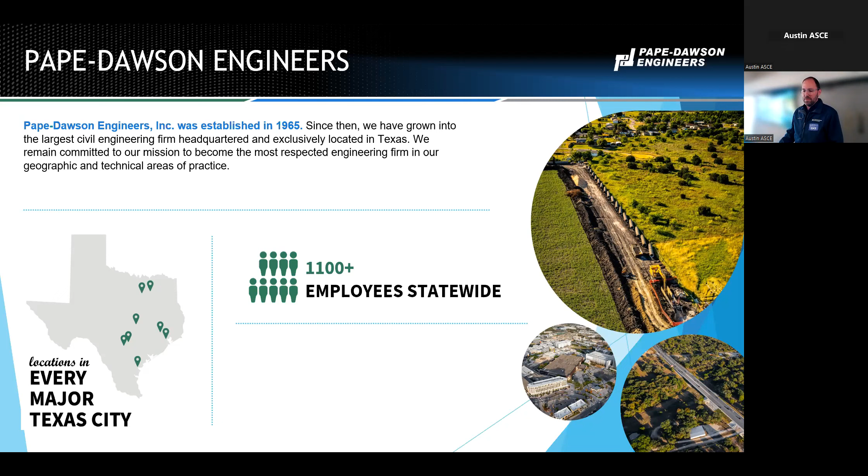Wanted to just talk a little bit about what we do and where we're going. I've noticed with our social media really ramping up, I think you see and hear us more in the community about what we're doing. We've been climbing the ENR rankings and Business Journal rankings. We're really becoming a full services engineering firm, and so we like to be active in our communities and volunteering.

Here's my Pape-Dawson contingent. You guys want to introduce yourselves? This came to the office 2 weeks ago. Yeah, so Brian found us, I don't know how, on social media, but he thought we were a pretty cool place to work, so he picked up his life and moved down here to Texas.

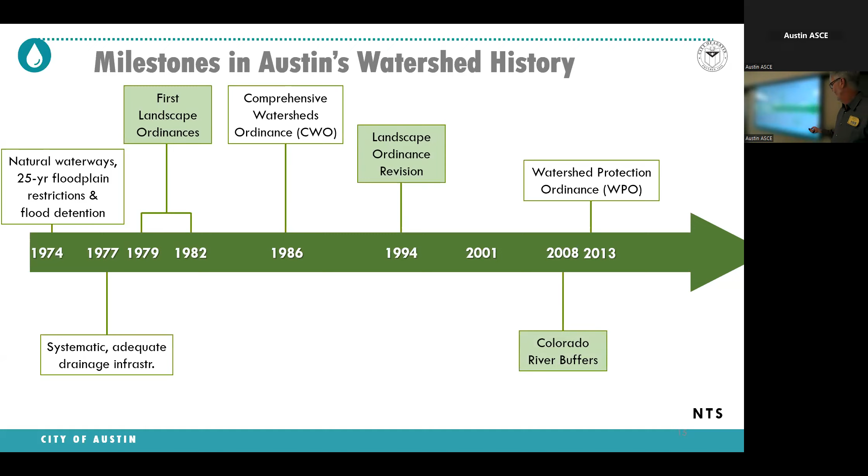Then in 2008, I got to shepherd this one through. We corrected some problems with our Colorado River buffers in this exact same area I'm going to talk about today. So we're going to talk about Colorado River buffers.

We're going to talk about functional green landscaping. I should have put on here that in 2008 we also had the commercial design standards, and there's a slide about that. That changed the way we build in Austin. Instead of having big parking lots in front of buildings with the Target or the Walmart behind it, now you're seeing Texas wraps and all these things up on the curbs, looking a lot different in terms of development patterns.

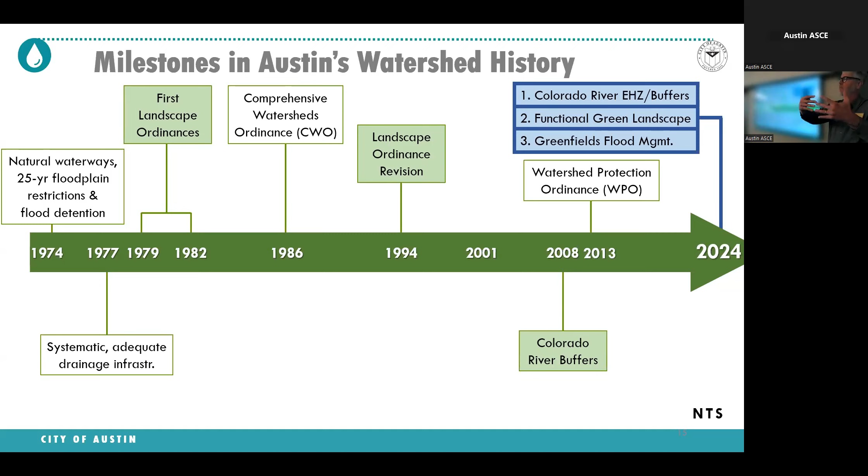All right, I'll talk about Colorado River first. A lot of words in here - I'm going to blow through these because I don't have that much time, and they're kind of tedious.

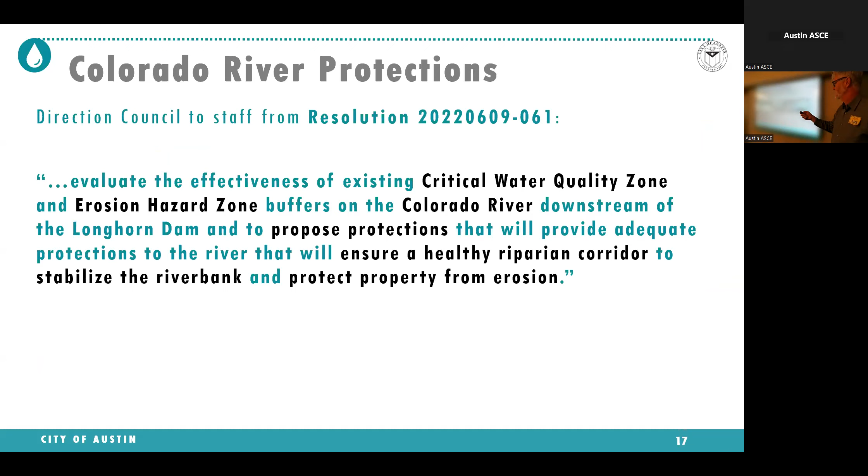Basically, the council says we need you to look at erosion, and we need you to look at water quality along the river below Longhorn Dam. That's where the river, since the Highland Lakes system really slows the water down coming through - it's not really a wild river downstream of Austin, but it's not a lake for the first time, right where Pleasant Valley Road is down there.

So thank you, Liz, who did a whole bunch of the work on shepherding this through initially last year, and a lot of these slides are from her slide deck. Anyway, we have crazy erosion going along those banks - it's kind of a normal process, you have erosion along a riverbank, but we need to make sure development is not harmed by that, and people are aware of the risks they're involved in.

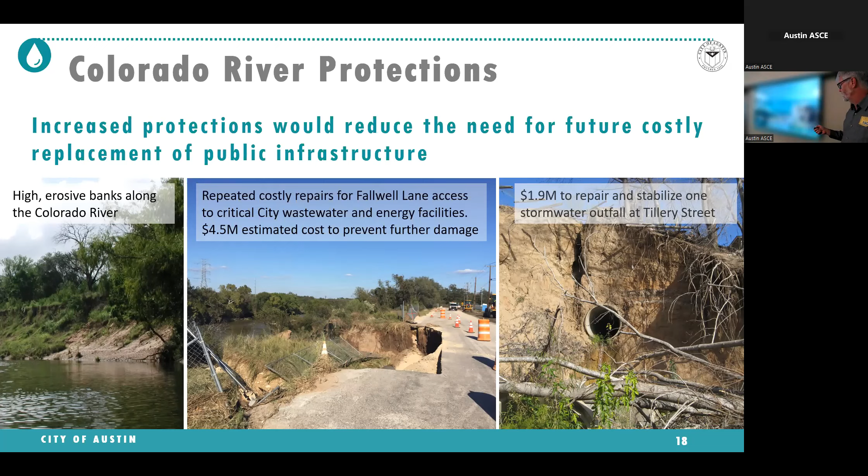I'll show you more pictures of Fallwell Lane there - that was a real problem, a $4.5 million project there. Another $2 million to repair this Tillery project, and I'll show you a few more shots of it. So the river is a river, and it's moving around, it's dynamic, and that's what happens.

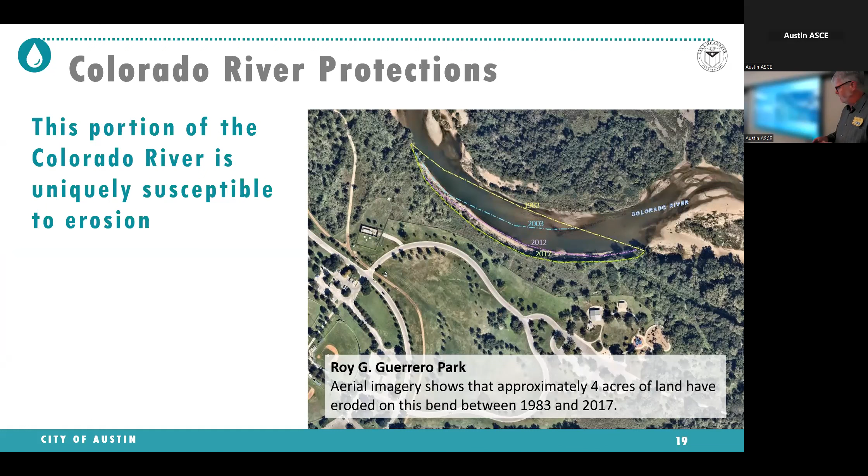And so this is just sand in here, and when the river is... this kind of charts these different - I don't know if I'm getting out of the picture here for my web people - but anyway, the river's really moving around, and it's really important that people understand that dynamism, and that our regulations understand that as well and work with it.

The community rightfully looks at this as a really incredible resource. I'd say the area below the Longhorn Dam is kind of undervalued. We focus on the lakes, which are beautiful and have tons of public participation, but there's all kinds of beauty, natural wonder, recreation opportunities, and natural function along these areas too.

Going back to the 80s and that milestones slide, we've done a pretty good job with stream buffers, but we're still trying to figure out the right size for the river buffer, which is just a different animal than a smaller creek.

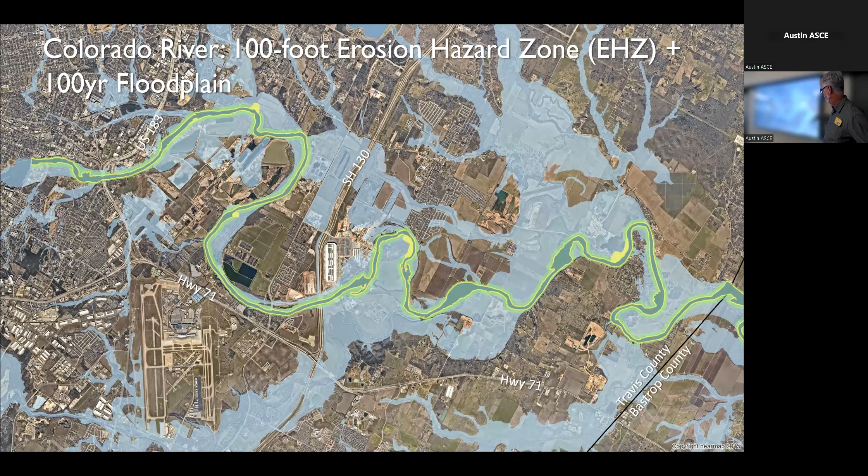If we take off the floodplains briefly, you'll see the green is the critical water quality buffer zone that protects natural resources and function. The yellow is a 100-foot erosion hazard zone, which is kind of thin for this area. That's probably inadequate for a big river like this—just the basic calculations of bank height times 4 or 5 to 1 would put you at about 400 feet from there.

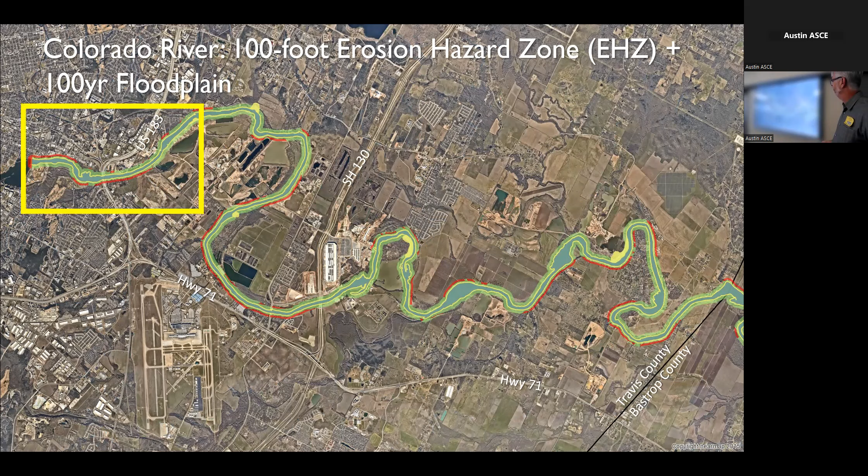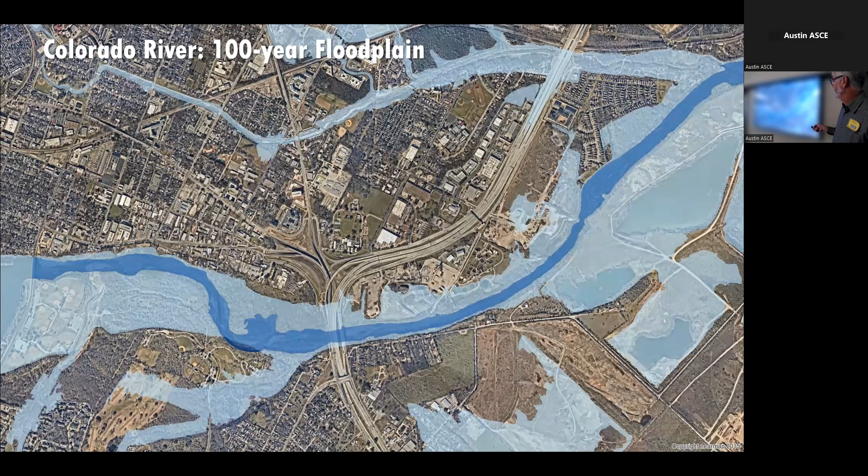So I'm going to zoom in on this rectangle. Here it is, zooming in, and this shows what's going on. Here's the river itself, here's the floodplains, and here's the current water quality protection zone.

This actually shows the genesis of the last buffer correction we had. This development was able to go in before the buffer was corrected last time, and a bunch of houses are literally like 40 feet away from the river. We've had a lot of those residents come say, could you guys take a look at this, we're a little scared here. This is a problem, and this could not happen today—you'd have to build out of that. But it was unfortunately a legacy of the past.

So what we're looking at now is potentially filling that in, and instead of having a variable 200 to 400 foot river buffer, going ahead and just calling it a flat 400 foot buffer.

Turns out Travis County, some years ago—I need to get the exact date, probably about 10 years ago—actually passed a 400 foot buffer. So if you go past our jurisdiction, it simply turns into a 400 foot buffer. There's a lot of discussion about ETJ release, with people saying the state just allowed us to release from the ETJ, why don't we do that? Well, if you did that, your project would actually become subject to the Travis County ordinance, which we think is a good protective ordinance. So we're looking at expanding this to 400 feet.

Whenever we do an ordinance like this, we look at the impacts to the affected properties and communities along the way. There's a lot of single family and other smaller lots along this reach that are shown in red. That would be the area of change—the area that would now be protected that currently is not.

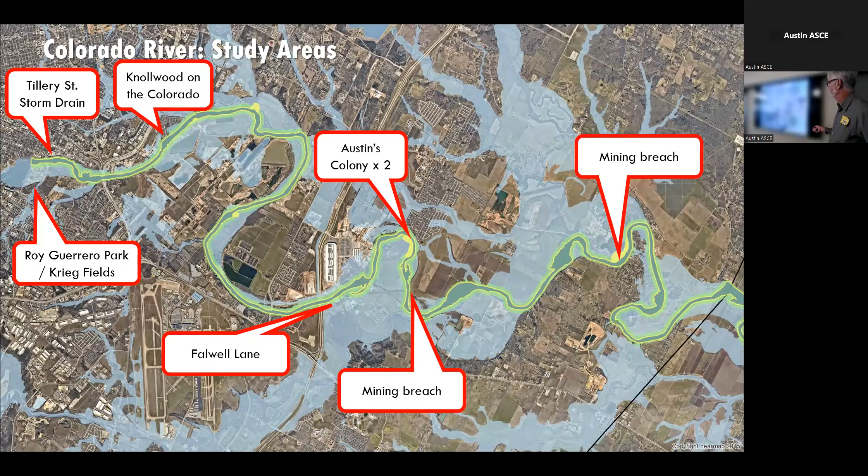So this was Tillery Street. This is really close, right across the river from Roy Guerrero. This used to be—you see these sections of pipe—this is a 66-inch pipe.

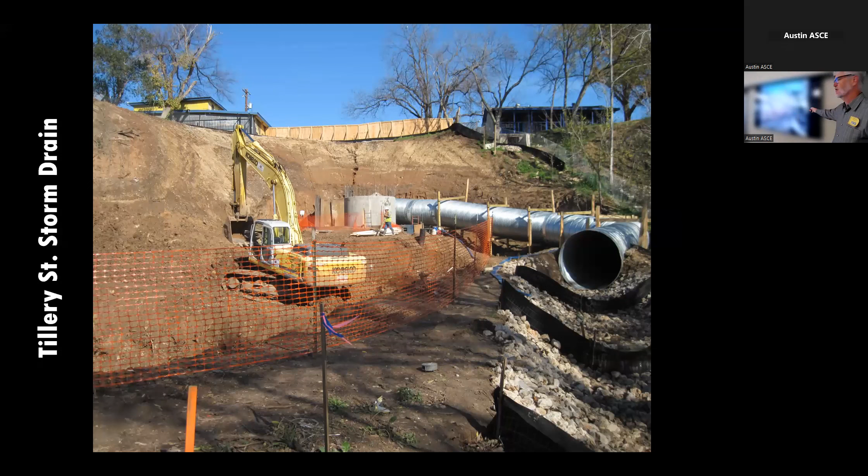This is not a trivial, 24-inch or 18-inch pipe, that's a giant pipe. So you have a giant project which had to correct this. I think this is during construction, right Morgan? So that's not even the final look, this is the final look. So it's this big high bank, it just collapsed and melted away because they had all this source of water running off, I think just a parking lot. Was that right, or was it from the street? So a pretty small source of water created that whole mess.

So we just didn't understand what that looked like when that was going on. I think the parking lot might have redirected the water. Yeah, it comes further up, more up Tillery.

So in Roy Guerrero, we've got this pre-photo and then the post-photo, this is the same, literally same view. HDR and some of our staff put these slides together sometime back. But anyway, that's unbelievable, and this is from the same vantage point, so it's just cut down that far, going through sand and gravel.

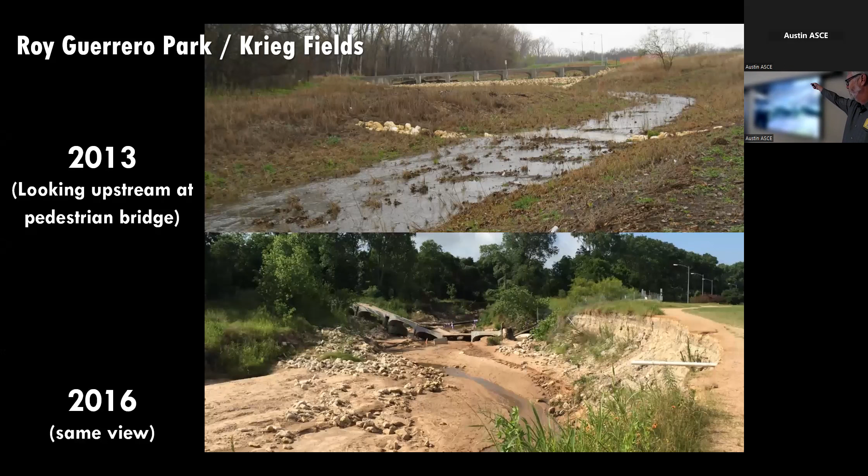Pretty painful. And so here it is again, if I can do it right - there's the same view of that beautiful pedestrian bridge, wiped out. So we're losing a lot of good stuff here, investments.

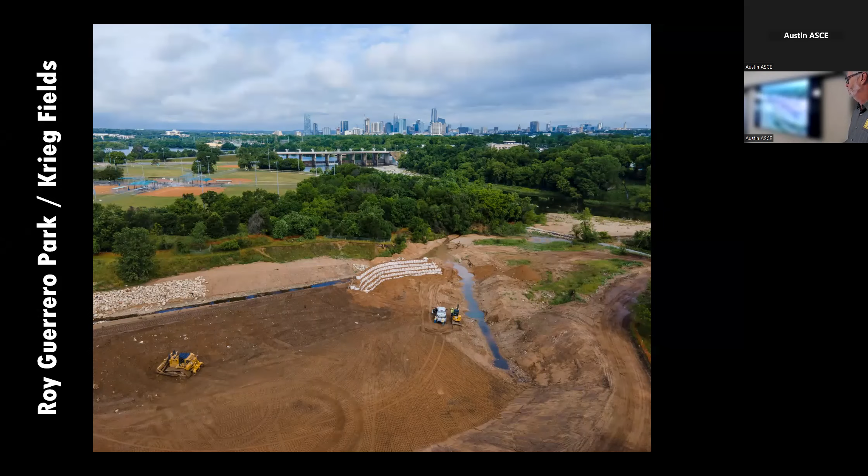And so now, this has been a little while back, but we're coming in trying to repair this, but it's many tens of millions of dollars to repair once the damage is done in this case. Look at that, that's very large scale. So we want to avoid this kind of thing with the way we develop.

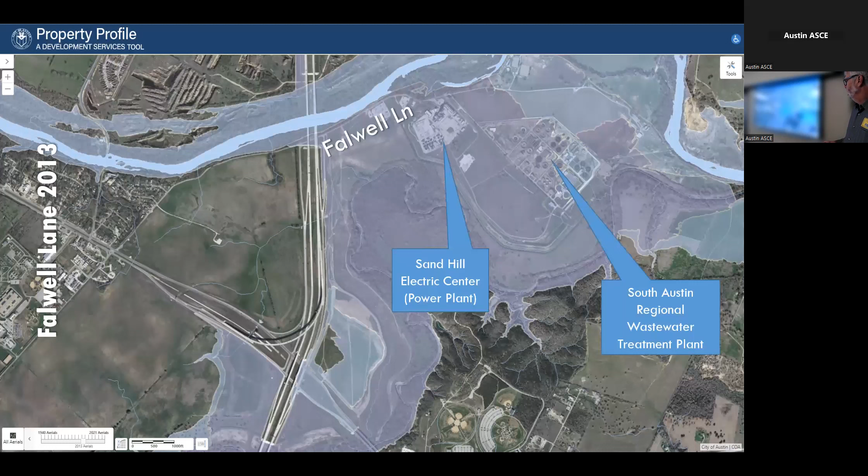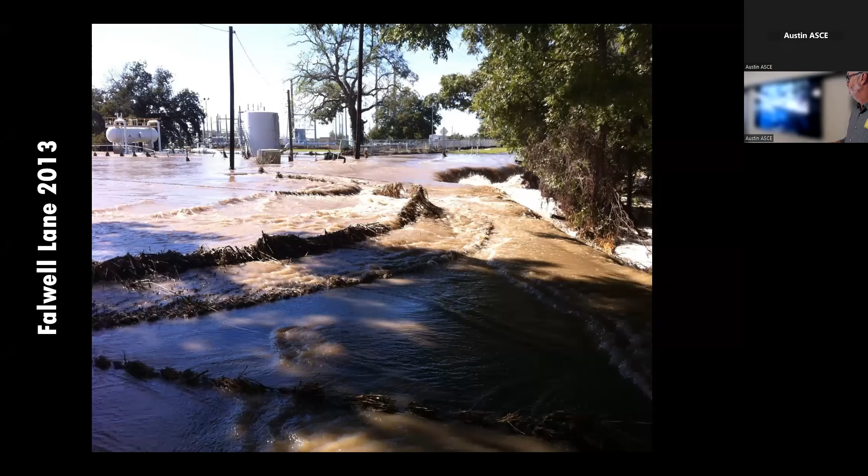This is just one more - this is Fallwell Lane during the 2013 Halloween flood. Onion Creek, bending along here, just overflowed straight to the river, wiped out a big section of the road. Here it is. So again, this is just right above sand, it's really erosive. So we need to figure out a better way to build.

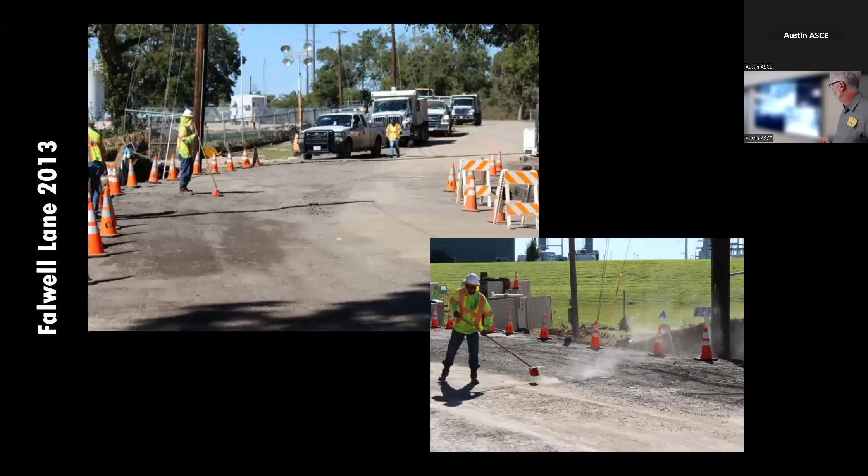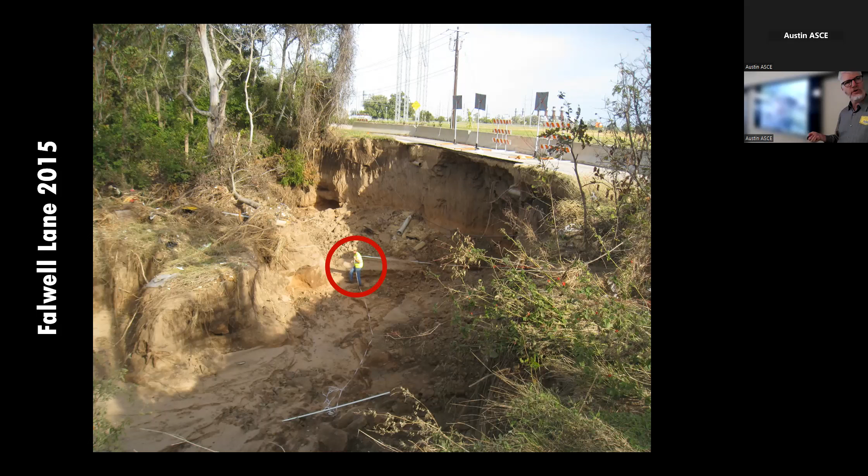So all these guys worked around the clock, got it rebuilt, and here it is, they fixed it, and then in 2015, two years later, it washed out again. So now we've got that - what was it, I forgot how many millions of dollars, it was $4 million or something. We're putting in like 60-foot piles or something like that to fix this. It's a non-trivial exercise in this huge river system that is built in sand. Look at that scale, and TxDOT's having to fight this.

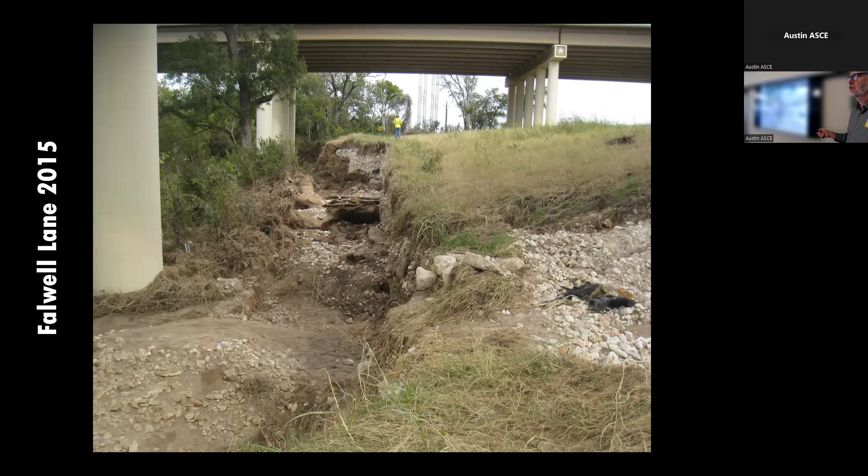This is SH-130 right next to Fallwell Lane. I think we're predicting they're gonna have some serious issues over time, the way they've got their drainage set up, but hey, we'll talk to them if they want some advice.

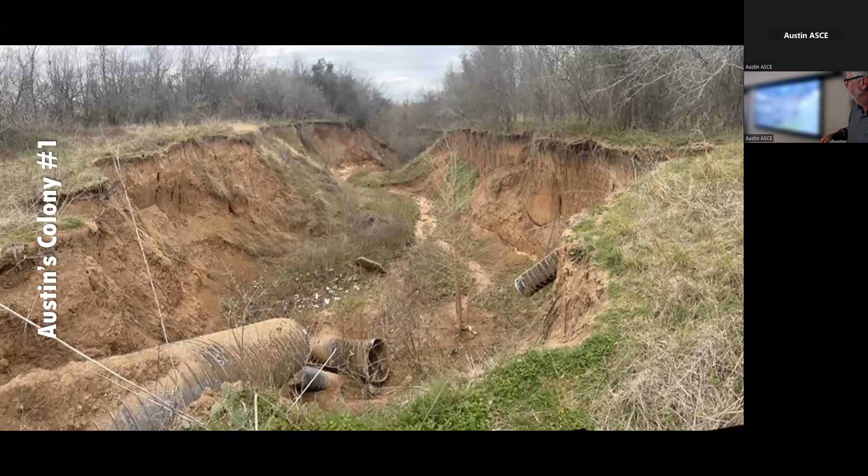Sorry, too many clicks, come on - too clever by half. There it is. So here's the water creating this canyon. It's really hard to get the scale, so I'm gonna go on a pretty near-term field trip with my erosion buddies out there. It's hard to imagine, the picture doesn't justify how alarming this is. Here's the other one, that's a smaller one.

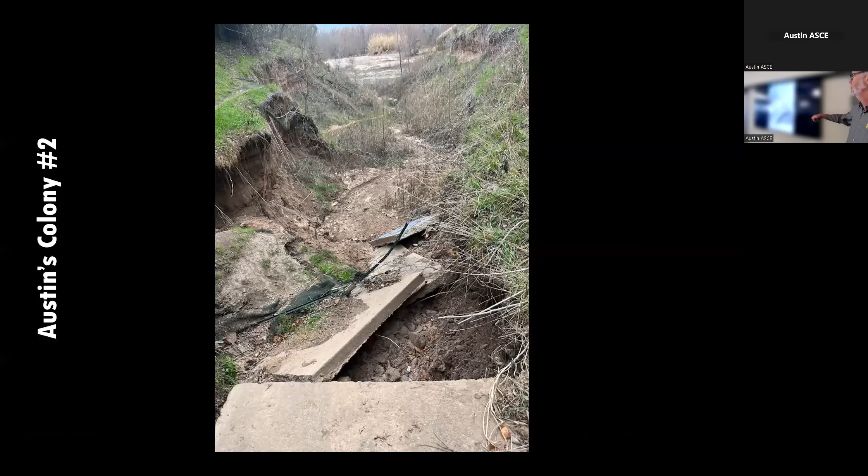But basically, we are looking at erosion hazard areas, and we're studying kind of where the action is, how far back we'd want to have a provisional erosion hazard zone, a verification area I guess you might call it. And then later on we probably are going to hire a consultant to map out that downstream to do a more official job. But we need an interim product, a little bit like Atlas 14, where we said we're going to use the 500-year floodplain, the old one, as a standby, and then we'll get it done in the next few years.

All right, so I took way too much time on that one, so I'm going to have to go faster and faster as I go through. Functional Green is a landscape ordinance.

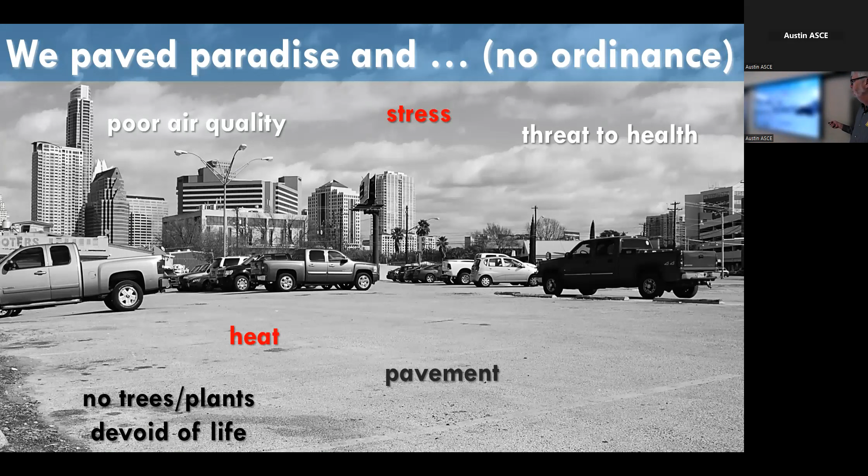I'm just going to blow through and talk about this. So we used to not have any landscape ordinance at all, and so you could just build a parking lot or whatever. And so folks did - they built parking lots, and things got really hot as a result, and uncomfortable and maybe unhealthy even. And so we had our first landscape ordinance, as I talked about earlier, in 1979.

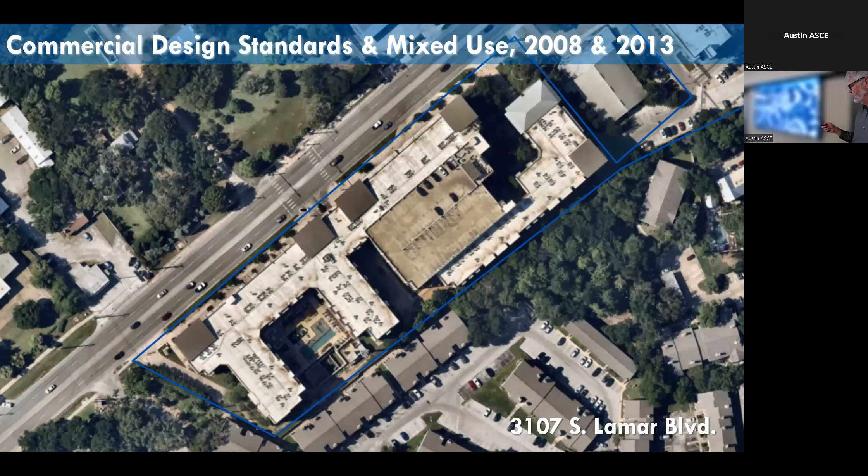Well, now we're bringing our buildings up to the curb with Subchapter E / commercial design standards, and so you don't have a lot of room there for natural systems. And so here we go - we have, yes, a row of trees in the front, but then you've got these big buildings and so forth, a lot of kind of embodied energy or heat radiating off of them.

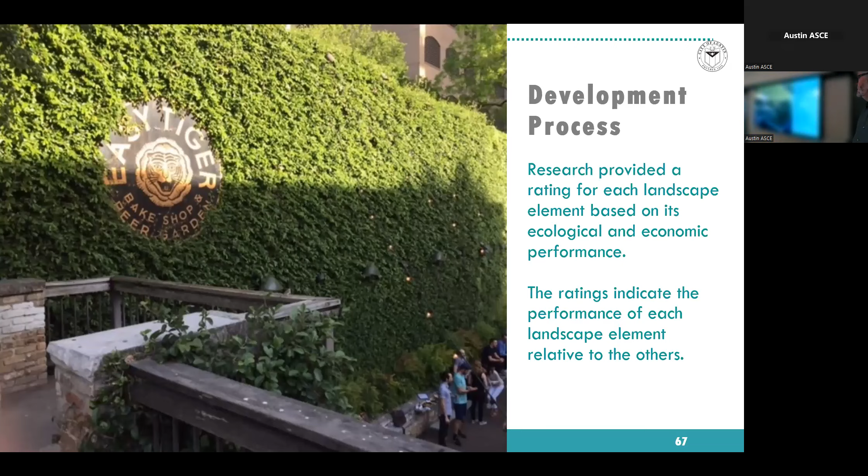So we're going to try to go from today's version using some systems that we've studied across the world, and in the United States, in Seattle and Washington DC. We have these two examples that we're coming up with a system that's pretty similar to them, although made more specific to our area ecologically. So we had these wonderful folks do a bunch of research on this, looking at those other systems. Again, I'm blowing through this.

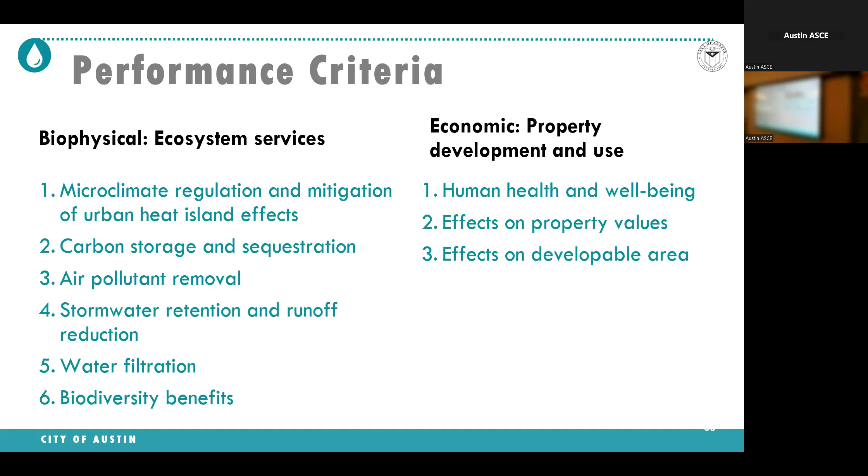We're trying to get ecological benefits, trying to make sure that this is economically feasible and makes sense for the projects. So all those things were taken into account when they first came up with the system.

It's only going to apply if your project is above 80% impervious cover. If your project has the right to have more than 80% impervious cover, you can't say 'oh, I'm going to do 79% even though I can do 85' - you'll still have to do it. But if you're at 80 or below, this won't apply to your project. Anything above 80, and it'll apply downtown.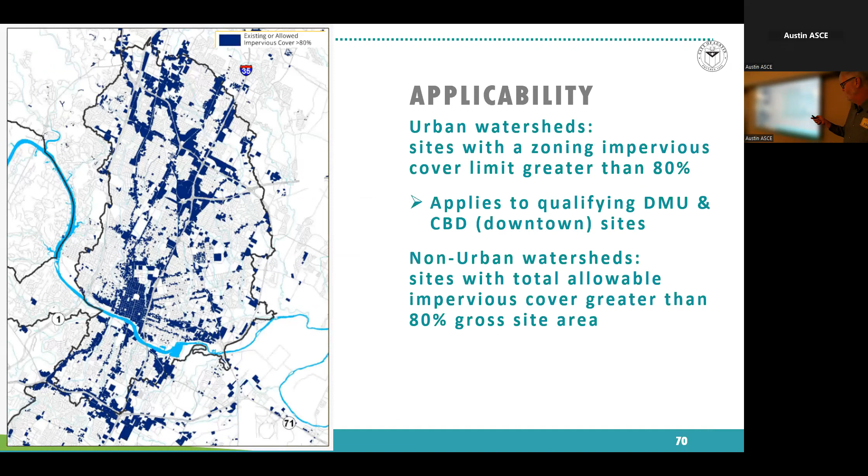Right now, downtown is exempt from the landscape ordinance. It's going to apply downtown as well, so that's a big change. Right now, downtown does have some landscaping, but it's generally in the public right of way using the Great Streets program.

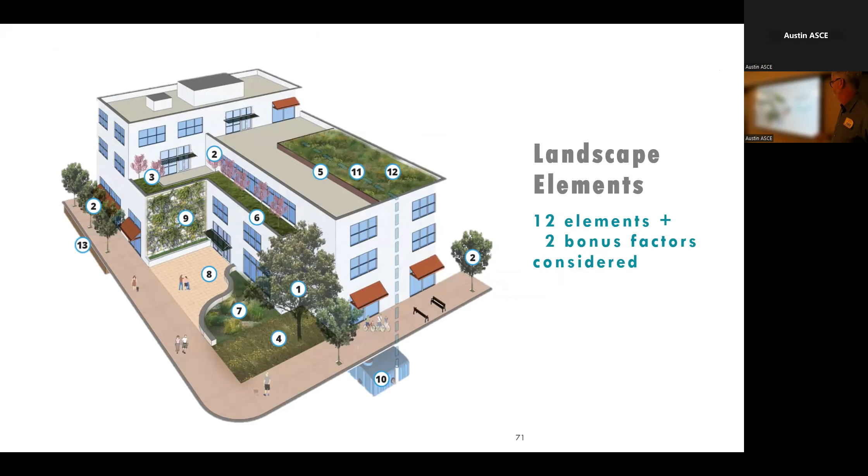All right, there's a ton of these - they're fun, but there's a million clicks, so sorry. There's 12 different things we're giving points to, so it's a point-based thing, a menu-driven thing. You get different kinds of trees - whether you're going to protect an existing one or plant a new small, medium, or large tree - you get more points for those.

You can use vegetative walls vertically, you can use green roofs horizontally. You can use green stormwater infrastructure that you're already required to do, like rain gardens or rain tanks or porous pavement. And then something we really like is this thing called suspended pavement.

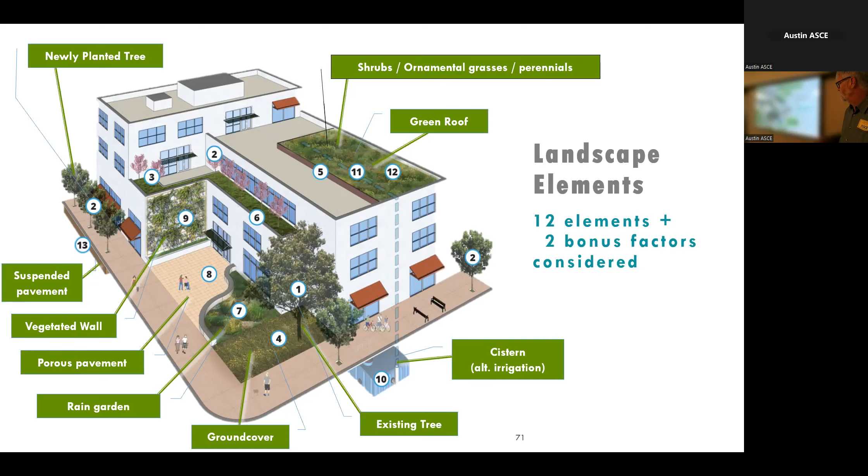If you're not familiar with it, instead of just one tiny tree well with a little bit of soil for a big old tree that doesn't grow big because it's too constrained, you can actually have a chambered system underneath your sidewalk, so you have the tree well plus a lot of extra soil in there, and the tree can be much more healthy and survive these brutal summers we're getting now, and provide the shade folks need for beauty and health and all the other good reasons. So you have this big system that gives different points to different things.

We're talking to our stakeholders actively right now. There's going to be a meeting on November 3rd, arranged by ASLA, the American Society of Landscape Architects, AIA, the American Institute of Architects, Downtown Austin Alliance, RECA, and the Urban Land Institute are all involved. So we're talking to them. We want to talk to everybody. We want to talk to you.

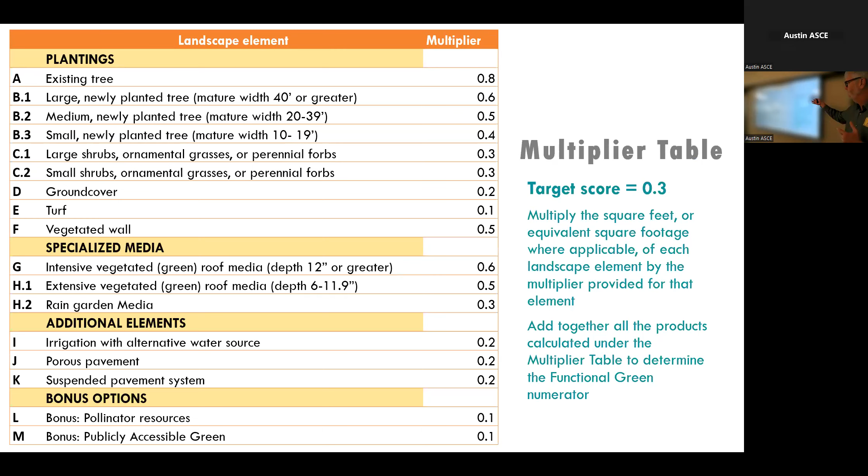If you guys want to talk more about this, I'm happy to come back or do something else. This is just kind of a preview. Again, this is more landscaping and less engineering, but there's lots of engineering tie-ins, as you as an engineer or architect are going to be trying to figure out how to integrate these things into your projects. You can stack things to get more points.

So we did some testing. The consultants we worked with did a bunch of good testing, and they found a project that looks pretty nice from the side - there's a Texas wrap on Burnet Road. But then when you actually look at it from the top, you can see it's the equivalent of a giant parking lot, although it has a more reflective white roof. That's good, but it doesn't have the same level of natural function that we're hoping to see.

So that's where this landscape ordinance comes in. Is it going to be just covered with a giant green roof? No. Actually, you'll probably be able to comply without having very many additional green roofs or walls, but that's an option. We get that question a lot.

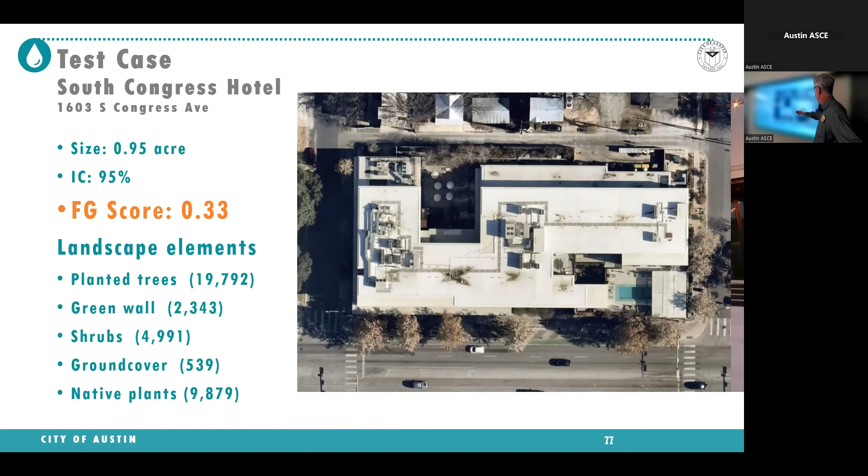South Congress Hotel is a site we tout as having done a tremendous job with incredible plantings, inside and outside their building, including in their courtyard. So they passed the test - they would meet for functional green without even trying to do anything extra. They've already done it, even though they weren't asked to, because it didn't exist when they built.

So we're going to conduct more workshops to keep testing this and get more feedback from our stakeholders, including y'all. Then we will go through the boards, commissions, and council process. All of these things are going through stakeholder processes approximately now through January, and then we'll go to code with these three things, staggering them. They're all different, but we won't get to council before at least February. Hopefully we'll wrap everything up by May.

Okay, whoops, that's the same stuff I just said. Okay, and then the last topic - how am I doing on time? Good. Okay, so this one is really interesting.

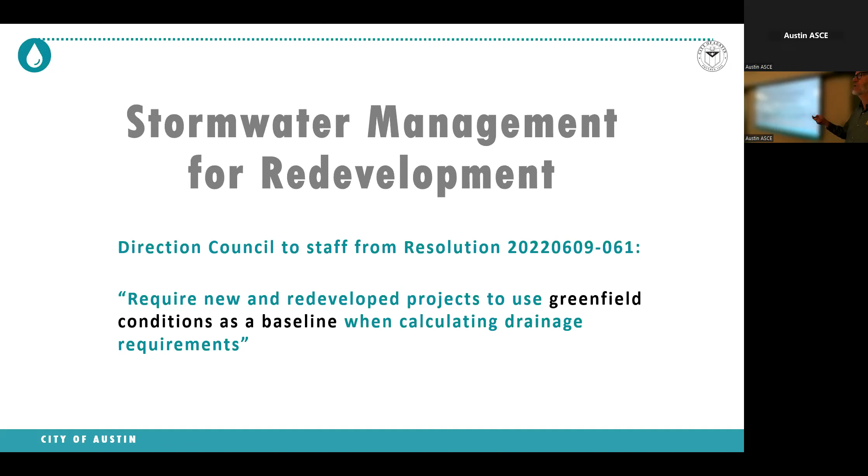Actually, I know Jose Guerrero is online watching this - this is one of his brainchildren. We're calling it stormwater management for redevelopment. It's had a lot of names, a lot of nicknames - one of them was greenfield detention. I hate that nickname, I'll say it, but I'm not going to propagate it by saying it again. These projects that would come through and be subject to this ordinance are not necessarily going to do detention, but it kind of helps you understand it a little bit.

So the poster child for this - back when I was showing the timeline, it talked about those early ordinances about not increasing peaks. The 1974 Creeks ordinance said you can't increase the 25-year peaks, and later on we had other versions for the 100-year and so forth. So when you come through with your brand new project, you take all the trees and vegetation off and put in your project - you can't have the peak increase, so you build a detention pond, and your peak gets flattened out and stays in bounds.

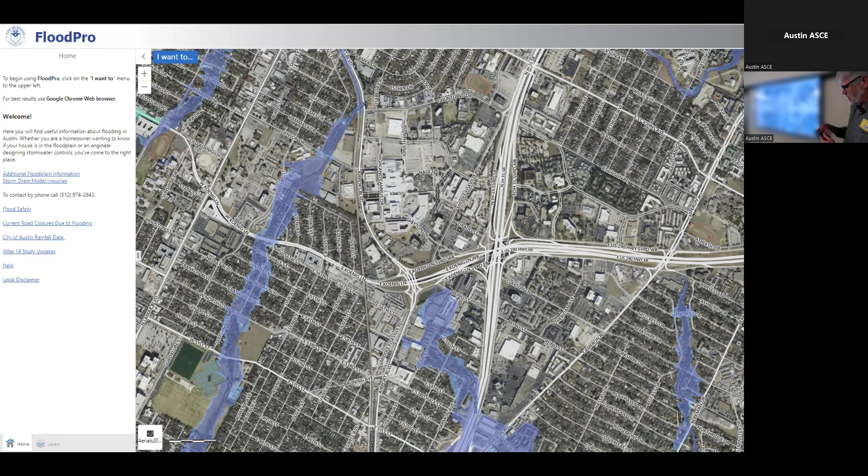And so that's awesome, and everybody knows you have to do that for a greenfield project. But if you build on what we call a greyfield project, you already have something like Highland Mall here. Highland Mall built in the late 60s, and of course nobody thought at all about this stuff at that point. So they just built a giant bunch of concrete and pavement and building rooftops. And here comes the water.

And so it starts flooding the downstream neighborhood more than it otherwise would have. I'm pretty familiar with this area. And so interestingly, back in 1986 with the comprehensive watershed ordinance, it says, you know what, if you redevelop...

Even if you already have pavement there, you're going to put in a water quality control - you're going to build your sand filter, nowadays green stormwater infrastructure, you got to put in a pond. So for whatever that is, going on 40 years, you've had to put in water quality ponds when you redevelop. But for all that time, we didn't retrofit in flood detention or flood conveyance or look at that - you just looked at the delta. So this ordinance is looking at that.

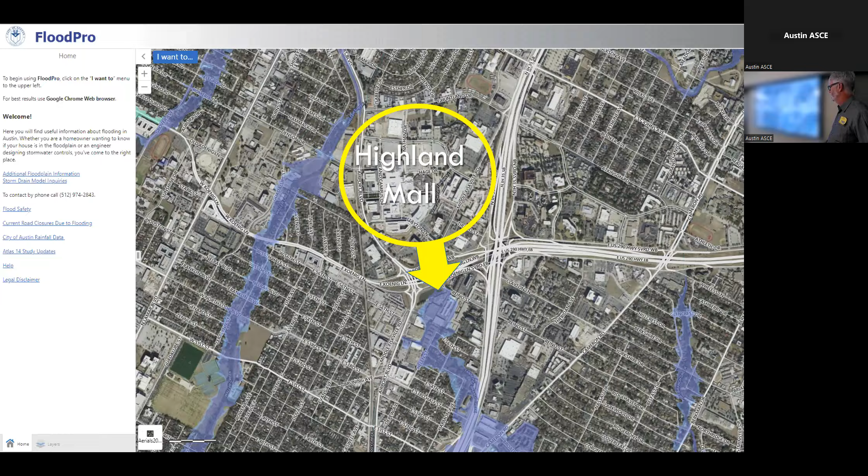This is a big deal. And I know there's been lots of different reactions to this, but I think it's something we need to look at as we move forward in a difficult environment in terms of drainage and flooding and climate change.

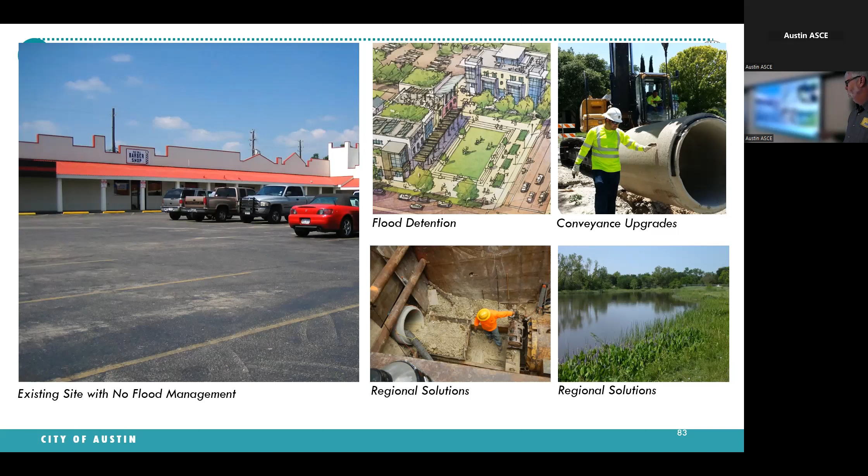So again, as Jose would say in his discussions about the regional stormwater management program that we already have, you don't automatically put in detention - sometimes you do other things. There's a lot of different options. And so these projects that would be subject to this could do a whole bunch of different things, you don't necessarily have on-site solutions, although that might be the best solution.

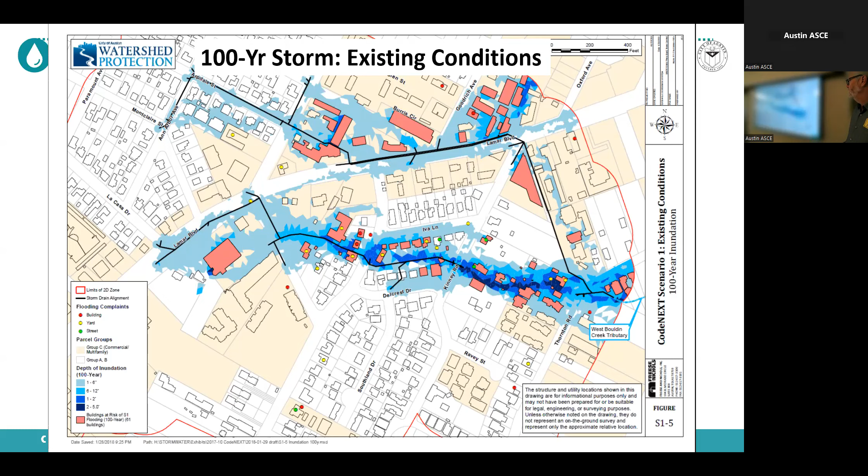We did model this scenario, I think it was during CodeNEXT - it might have been Land Development Code Revision, those are really blurred together in my mind. But we looked at this as the Del Curto subdivision, an area of town off of South Lamar. And so when you assume that all of the site plan eligible properties have to go with greenfield levels, you get a little change - it's not big, it's not great, it's not a bold improvement, at least at this scale.

And so I think that's one of the things we're looking at with this. I think it's very unlikely that we're going to go through and say every single site plan has got to do this new thing. We're probably going to say we're going to look for a threshold at which your project's big enough that it's going to make more of a dent in the problem. And therefore we're going to pick - I don't know - 5 acres, 10 acres, 3 acres.

We don't know yet, but we're going to be talking to stakeholders, and we'll be doing a lot more GIS crunching and so forth and show you guys the results of that. So I think it'll be an 80-20 rule where we go, you know what, 80% of the land is in 20% of these sites. They're bigger, they can absorb putting in a new detention pond or putting in the new drainage infrastructure that would be required by that. And then all of these very, very many tiny projects would be let off the hook because they're probably not collectively contributing meaningfully, and the administration of this would not be worth that effort.

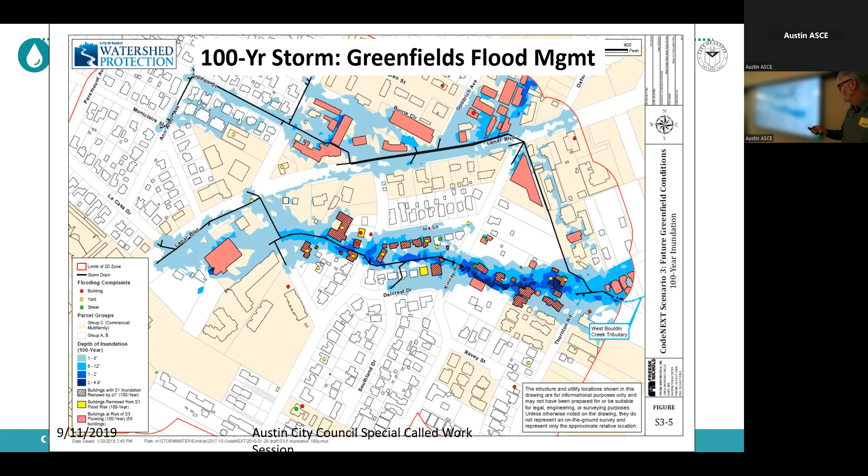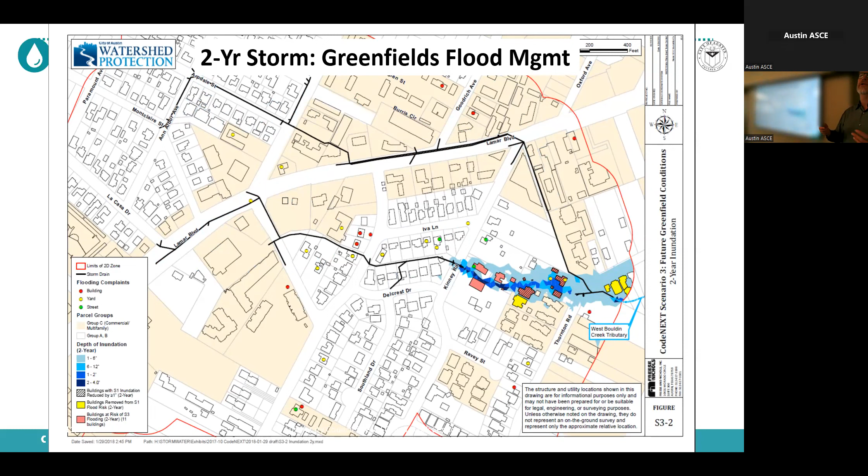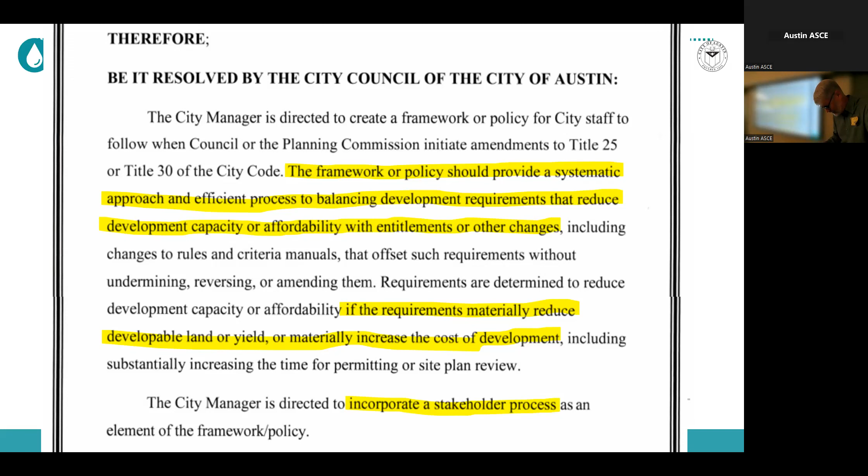They basically said, we want you to do these things. We want you to get these environmental drainage benefits, but we also don't want you to overly impact development capacity and housing affordability and so forth. So we need you to do some kind of balance on this. Basically, they want us to be bound to bring in a balanced proposal on this. Unless you haven't been in Austin very long, you know that housing is a big priority here and a major policy consideration. So we're really looking at that too.

Too much detail to talk about everything, but basically we're performing an analysis, looking at the size distribution of these parcels, trying to come up with the right position for this in our view for the staff recommendation, and then we'll take it on to council. This is the least developed of these three, but it probably has the most impact on projects, and people are going to want to know how this works out. So we need a little more time with it, and our stakeholder interactions are going to go a bit longer on this.

So we have a little bit of time for questions, and I'm going to see if Liz and Kevin can help out if we get stumped. So that's it. Any questions?

The question was about the critical water quality zone buffering, and the opportunities for placing biofiltration water quality ponds there. Yeah, I think we'd keep that. That's a great question. So yeah, we do that now. In the old days, it was like, if it's a green stormwater infrastructure control, you can do that in the upper half of the buffer. Well, almost everything's GSI now. So yes, that first 200 feet, you can put that in there. And Liz, yes, or please correct me.